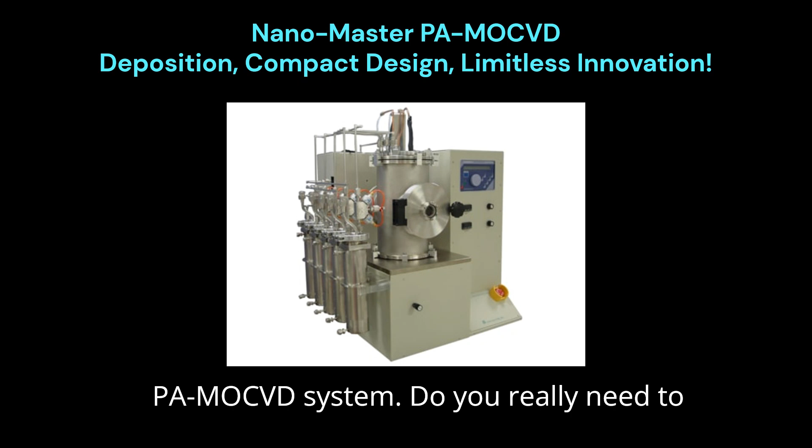Revolutionizing MOCVD for research and innovation. Meet NanoMaster's PA-MOCVD system. Do you really need to spend millions on an MOCVD system just for research?

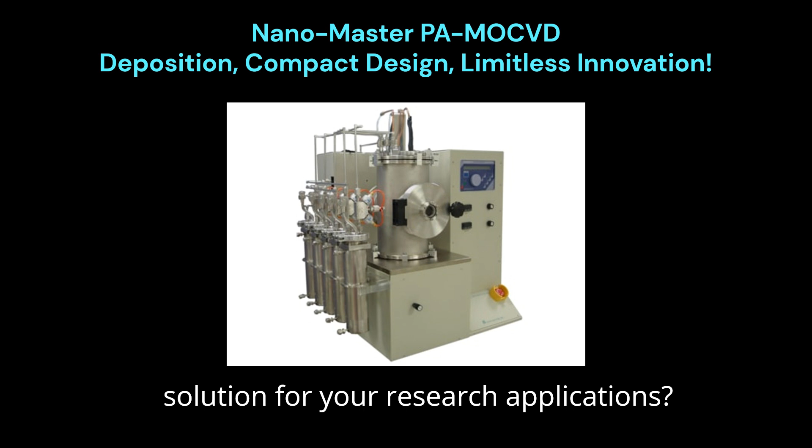Struggling to find a high-performance desktop MOCVD solution for your research applications? Introducing NanoMaster's Plasma-Assisted Metal Organic Chemical Vapor Deposition (PA-MOCVD) system, the world's first tabletop PA-MOCVD system designed for cost-effective deposition of gallium nitride (GaN), indium gallium nitride (InGaN), aluminum nitride (AlN), and aluminum gallium nitride (AlGaN).

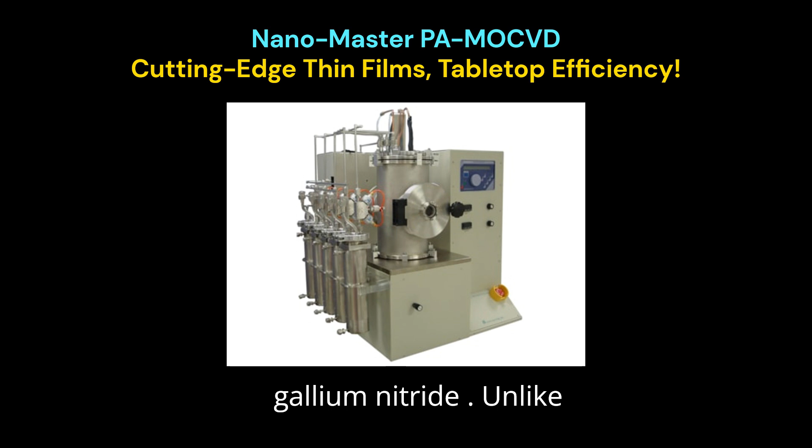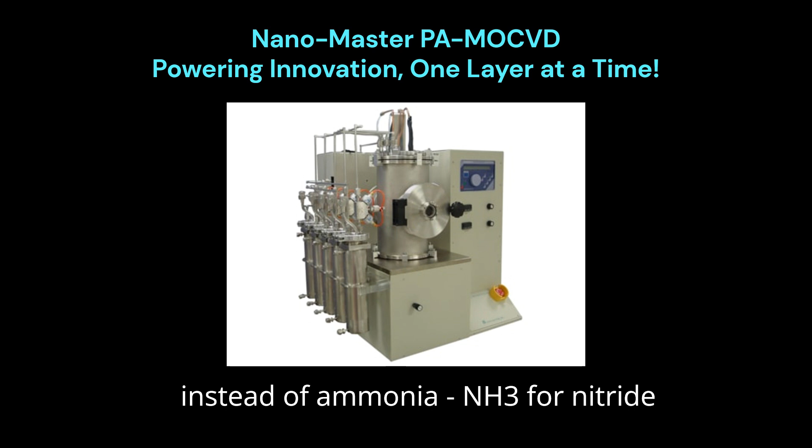Unlike traditional MOCVD systems, this unique plasma-enhanced technology uses nitrogen instead of ammonia (NH3) for nitride growth, eliminating ammonia abatement and reducing hydrogen content in the films.

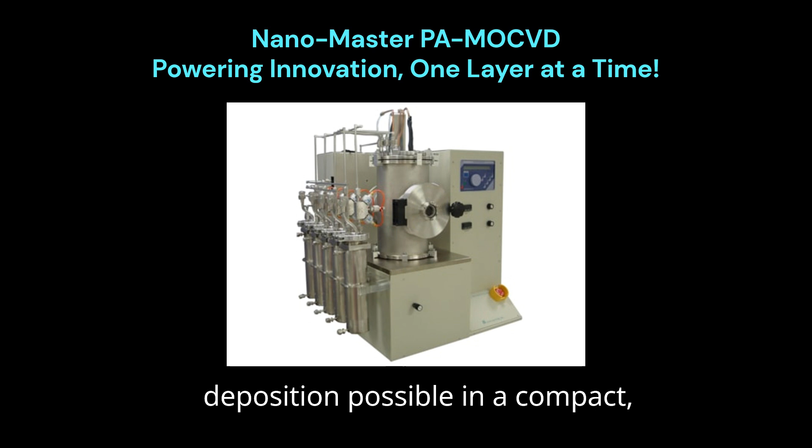The RF showerhead plasma source enables lower deposition temperatures, 600 degrees Celsius versus 1,100 degrees Celsius, making high-quality thin film deposition possible in a compact, tabletop system. For manufacturing scalability, the system is cluster-compatible, allowing higher throughput production.

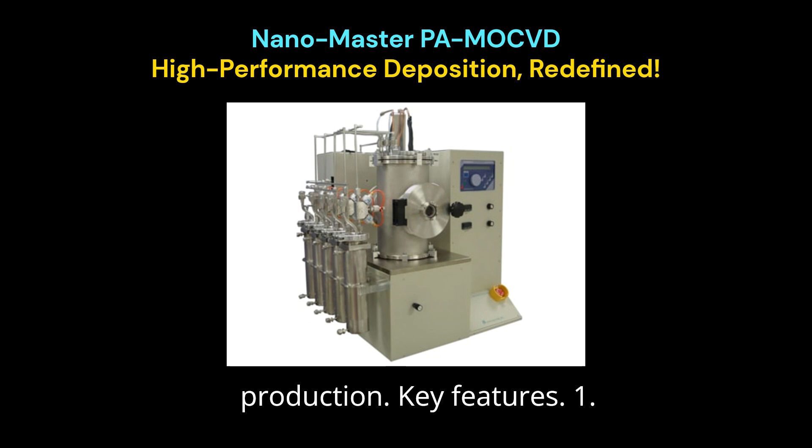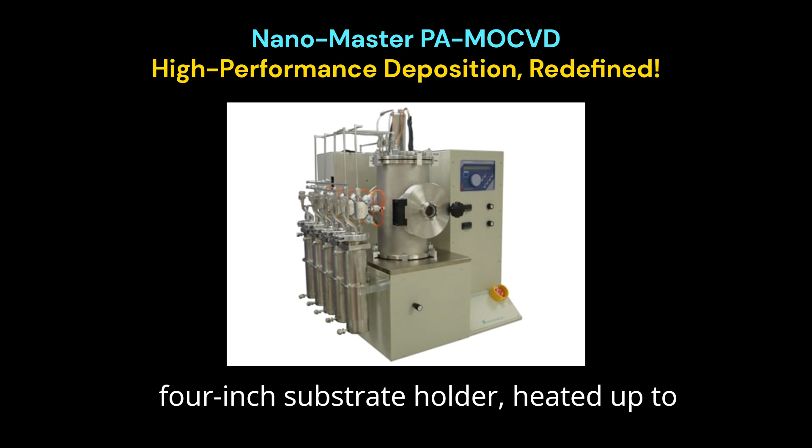Key features: 1. Tabletop design with a 10-inch stainless steel chamber. 2. RF plasma source with showerhead gas distribution. 3. 4-inch substrate holder, heated up to 900 degrees Celsius. 4. 5 bubblers with individual heating and cooling baths.

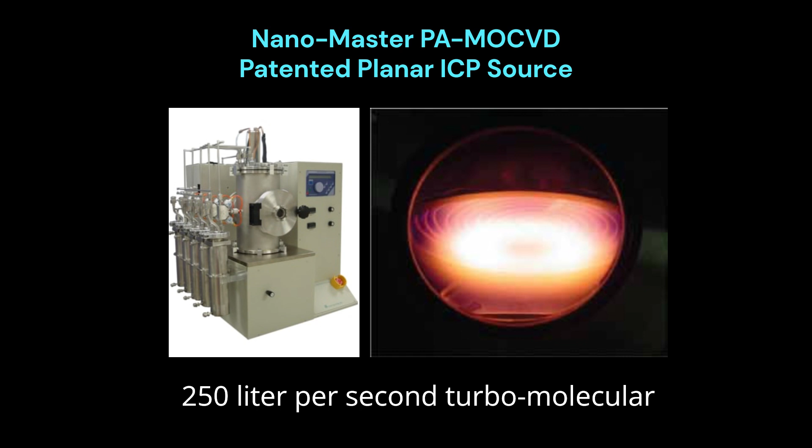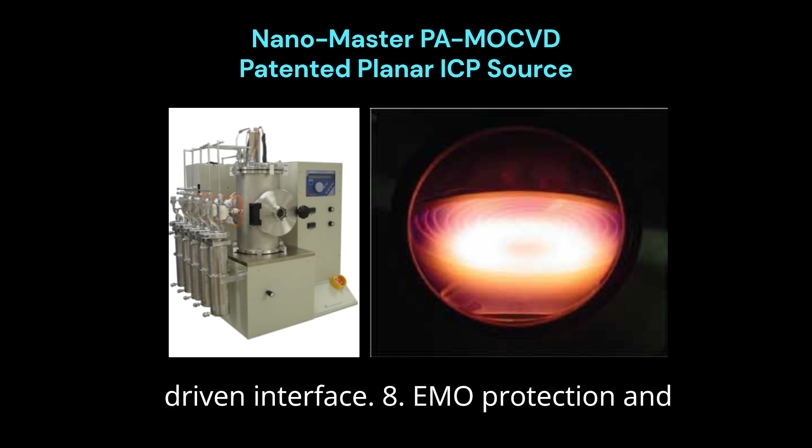Customizable options for your needs: 1. Standalone system or cluster-compatible design. 2. ICP or microwave plasma source. 3. 14-inch electropolished chamber for larger-scale research.

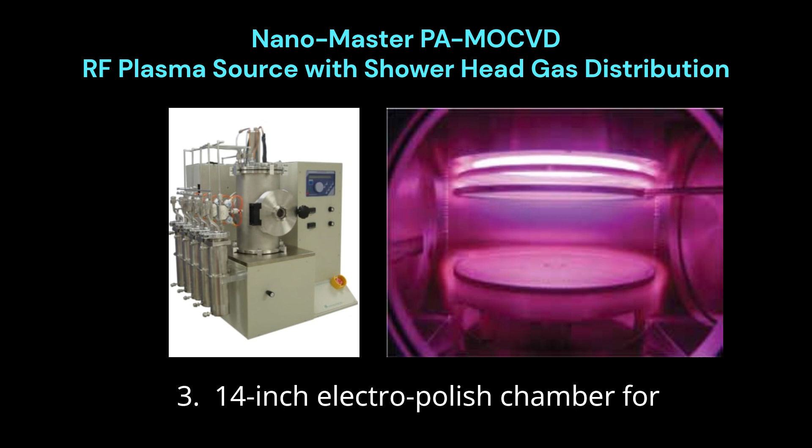4. 8-inch or 12-inch substrate holders. 5. Additional bubblers and MFCs. 6. Auto-load/unload feature.

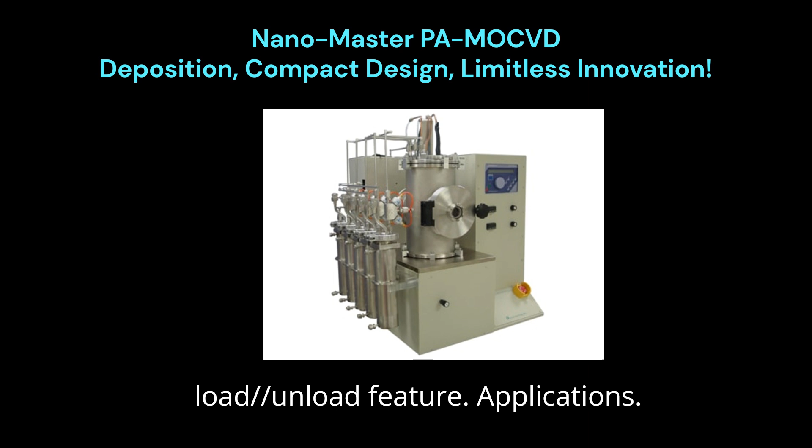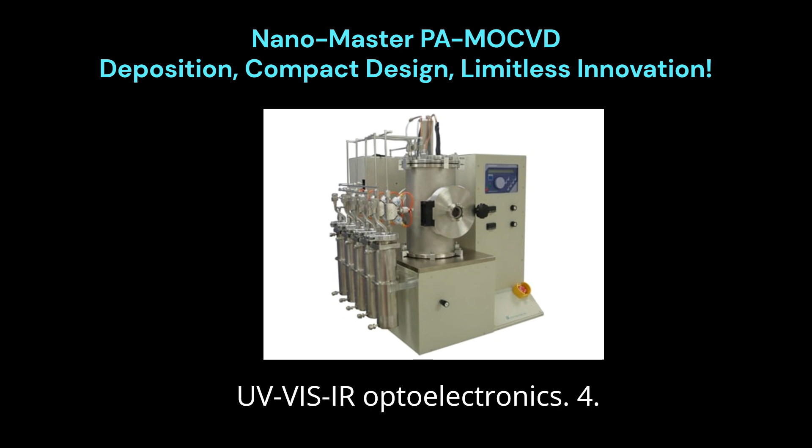Applications: 1. III-V semiconductor layers. 2. Blue LEDs and laser diodes. 3. Indium nitride nanorods for UV-Vis-IR optoelectronics. 4. Molybdenum disulfide (MoS2), boron nitride (BN), and graphene for 2D and 3D materials.

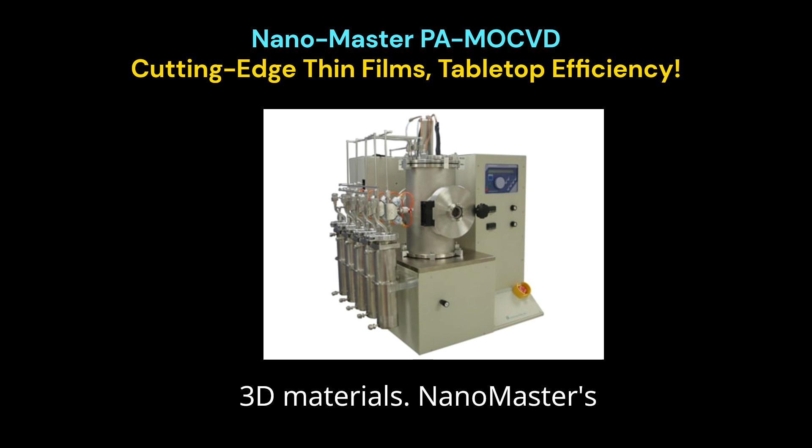NanoMaster's PA-MOCVD system is designed to empower researchers and innovators with cutting-edge performance at a fraction of the cost. Ready to take your research to the next level?